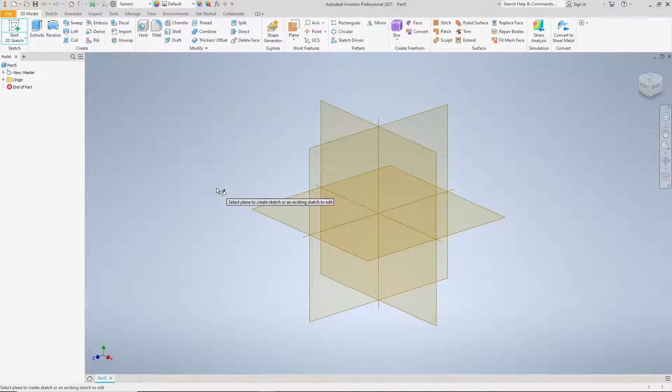I'm going to start a sketch on my XZ plane, and I'm just going to straighten out my view cube in the top right-hand corner. Now we're going to draw our shape, and remember we're just drawing a rough shape for right now.

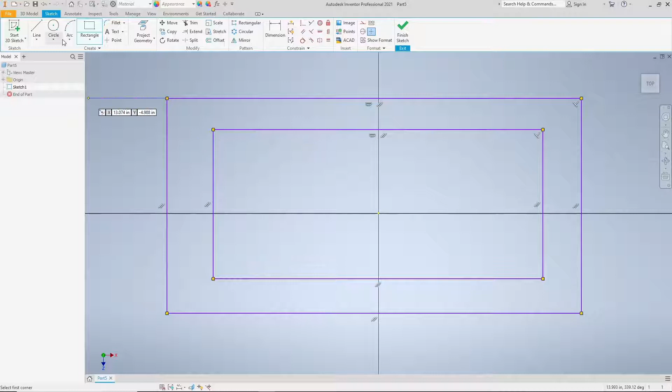So I'm going to place a 2-point rectangle arbitrarily on my screen, and because this command is still active, I'm going to go ahead and place a second rectangle on my screen. I don't have to open that command again, and I could continue placing 2-point rectangles on here if I wanted to. However, I'm going to move on now and place a center point circle. So I'm just going to grab that center point circle command and toss a couple of circles on my screen.

Now it really doesn't matter where you place them, just notice I'm not drawing anything that's locked into my origin point or my center point. So when I talk about the origin point or the center point, that's the little yellow dot between the X and the Z axes on my screen here. So I'm not locking anything into place. Everything's just kind of floating out there.

In Inventor, we use dimensional and geometric constraints in order to fully constrain or to finish our sketches. So in this video, I'm going to go over dimensional constraints. In your Sketch tab, make sure you're on your Sketch tab, follow the ribbon over to the right until you find the Constrain panel. In the Constrain panel, you'll find the dimensional constraints and the geometric constraints that you can use in order to fully constrain your sketch.

This is the General Dimension button. Left-click on the General Dimension button to activate it. You'll notice it goes blue. And we're going to start by dimensioning the top line of our sketch here. There's a few different ways you can dimension a line, and we'll go over those. You're going to start by clicking on the top left corner.

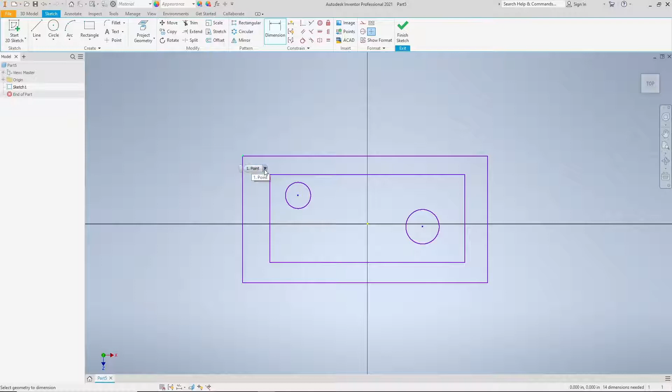You'll notice the little corner point goes green as you hover your mouse over it. And if you let your mouse sit there, Inventor's actually going to give you a drop down here, and it's giving you all the options you can select at that point. So we're just going to click that top corner point. Now, we're saying we want to dimension from this point to another point.

So let's go grab the corner point at the right-hand side of our rectangle. So again, find that little green dot. And you'll notice once you pick both points, Inventor has a distance to measure. It's saying, okay, we'll give you the linear distance from this point to this point. So we're getting our horizontal dimension here. Go ahead and left-click to place that dimension on your screen.

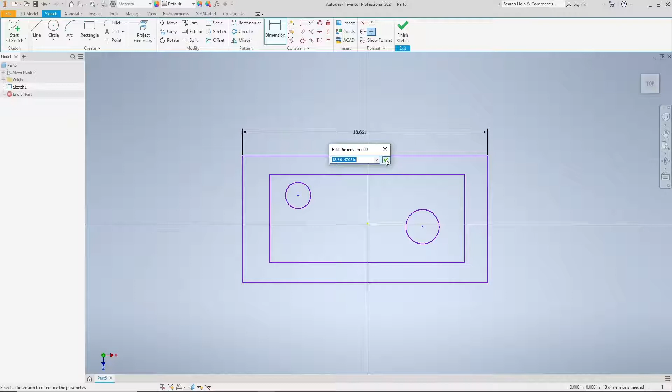Now when you place that, depending on what settings you have set up, you're going to get the Edit Dimension dialog box. For right now, we're just going to accept this at whatever value pops up. It's okay if yours is 2 point something or 40 point something. Don't worry about the value for now. Right now, we're just going to accept whichever value pops up.

Let's go ahead and dimension the left side line now. Now, with the first dimension, we went from corner to corner. Another way you can do linear dimensions in Inventor is to select from line to line. So go ahead and select that top horizontal line on your rectangle. Move your mouse down to the bottom horizontal line and select it. And you'll notice Inventor is going to give us a dimension that goes from this line to this line because those two lines are parallel. Move your mouse out to the left.

Now when I place dimensions on my sketches, there's a couple things I watch out for. I want them to be close enough to the sketch that I can easily find them and read them. What I mean by that is I don't want my dimension way off to the side here, off the side of the screen. But I also don't want my dimension inside of my sketch. It shouldn't be overlapping my sketch, and it definitely shouldn't be overlapping the line here so that you can't read the number. Notice if I place this right here, I actually wouldn't be able to read the 9.331. The one's kind of hiding.

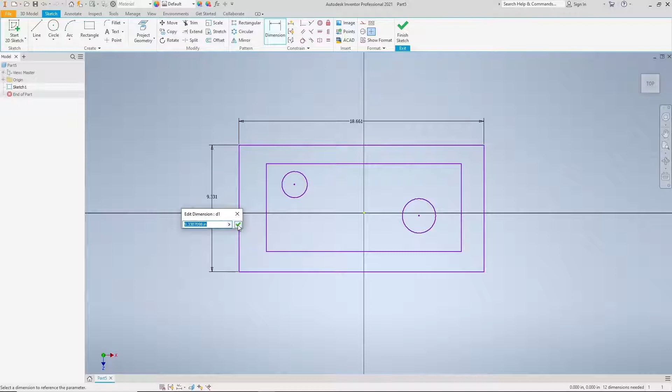So I like to place it just to the outside of my sketch, something like here. And again, for now, we're just going to click that green check mark and accept the value at whatever value it is right now. The third way you can dimension a horizontal or vertical line is just to click on the line itself. So again, my general dimension button is still active, so we're still good to go.

Go ahead and click on that horizontal line on your smaller rectangle. You'll notice just by selecting the line, Inventor is going to give us a dimension of the length of that line. So one click. Again, we're going to drag that to the outside of our shape and just place that and accept the value. Now let's go ahead and do the height of the smaller rectangle. So again, I'm just going to select that line, drag that to the outside of my shape, place it, and accept the value. So you should have 4 dimensions on your screen right now, 2 vertical and 2 horizontal.

To edit the values of your dimensions, if your general dimension button is active, you only need to click on those dimensions once. The Edit Dimension dialog box will pop up, and in here you can edit the value. If your general dimension button is not active, you just need to double click on the values in order to edit them. And then the same Edit Dimension dialog box will pop up. So now let's go ahead all together here. We're going to double click on the largest dimension here, the length of the biggest rectangle.

Here's a quick little tip for you when you're designing your shapes in Inventor. You want to dimension the largest features first and then work inwards to the smallest features. Sometimes when you place dimensions on your sketches, your sketch will do what's called distortion. It will actually cross over itself and kind of lose that general design intent that you put so much work into with your overall rough sketch. So start with the biggest dimensions and work inwards to the smallest dimensions. That should give you the best success when dimensioning your shape.

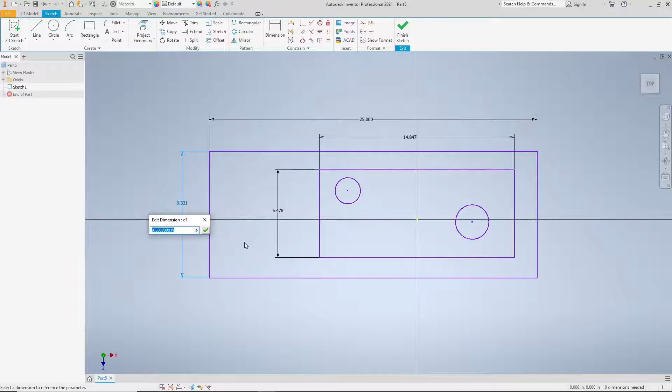So double click on the length of this rectangle, and we're going to change this to a length of 25. So type in 25, and that will be in 25 inches, and you can either hit the green check mark or hit enter on your keyboard. Notice that Inventor automatically updated the top and bottom horizontal lines so that your rectangle kept its 90-degree angles in all 4 corners. Now let's go ahead and edit the height of this rectangle. So double click or just single click depending on if your general dimension button is active, and type in 10.

Let's change the length of the smaller rectangle now. So find the length, the horizontal dimension of the smaller rectangle, and type in 20. Change the height of the smaller rectangle to 8. Now we're going to right click, and if you have your general dimension button open, just choose the OK button to close that.

Now if you want to move your sketch dimensions out of the way, so for example my 8 is kind of overlapping my x-axis here and it's kind of hard to read, plus it's also on the inside of my shape, which I don't like. So just make sure your general dimension button is not active, otherwise this won't work. But you can just left click and hold, and you can actually move these dimensions around.

So that comes in handy sometimes when you're trying to select part of your sketch and the dimensions are in the way. So you can just move them to where you want them to be. So again, if you need to move your top ones, just left click and hold, and you can drag them to wherever you need them on your page.

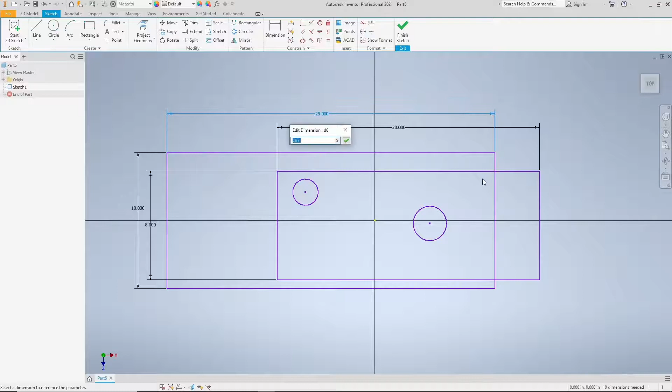Now if I want to change my dimension values again, so I changed my length of my biggest rectangle to 25 inches to start with, but I actually want that to be 22. So you can edit these as many times as you need until they are the values that your design needs. So I'm going to double click on that 25 and change that to 22. And notice that my rectangle updates to match those changes.

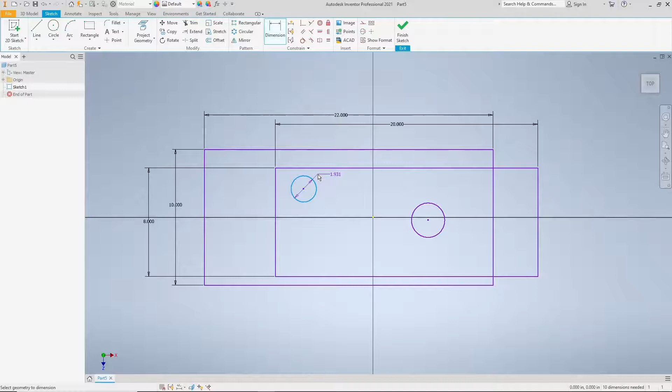Now we're going to dimension the size of our circles, so click on that general dimension button again to activate it, and the general dimension button is actually very handy. You don't need to pick a bunch of different buttons for all the different types of dimensions you're placing on here. So for our circle, we're looking for a diameter. You just left click on the circle and Inventor automatically recognizes that it is a full non-broken circle, so it's going to give us that diameter dimension.

So we're going to drag that outside of our shape so it's out of the way and type in a diameter of 2. Go ahead and dimension your second circle to also have a diameter of 2.

Every dimension we've placed onto our screen up to this point have been what are called size dimensions. There's two different types of dimensional constraints we talk about in Inventor. There are size dimensions, and then there are location dimensions. So size dimensions actually change things like the length of a line, the size of a circle, the size of a slot, the length of an angle. It actually changes the physical size of your sketches.

Location dimensions do not change the size of your shape. Location dimensions actually just place all of your little sketch features where you want them in relation to one another. So what I mean by that is currently my little rectangle here is sort of overlapping my big rectangle. I actually want this little rectangle to be located in the center of my big rectangle. So let's place a location dimension on here.

I'm going to dimension from the left vertical line of my larger rectangle to the left vertical line of my smaller rectangle, and we want this to be centered, so that's going to be a value of 1. So go ahead, edit that dimension to 1 inch. And what we did there is we didn't change the size of anything, we just changed the location of these two rectangles with regards to one another.

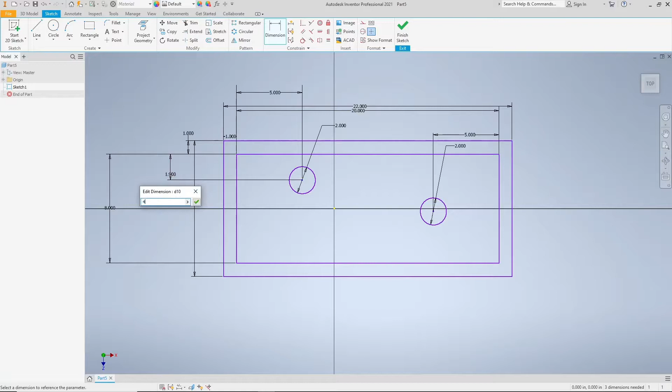And do the same thing for the other circles. So from the top line of my smaller rectangle to the center of my circle, type in a height of 4. So now all of my rectangles and my circles on my screen are all dimensioned in size, and they're also dimensioned in location to one another.

Now there's one last thing we want to do. We actually want to dimension our sketch with regards to the center point of our screen, so the origin point between the X and the Z axes. So we're going to center our entire sketch around that origin point. We're going to create a dimension from the very left-hand vertical line of our big rectangle to the origin point on the screen. It's that little yellow dot where your X and your Z axis meet. Drag that out of the way, and that one's going to be a distance of 11 to center it. Again, we've just done the horizontal constraint. Now we need to do the vertical constraint.

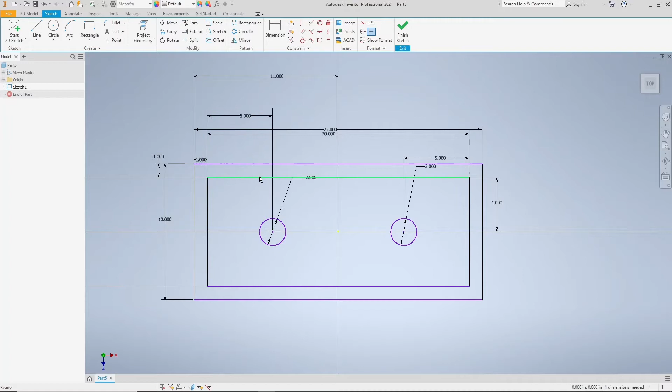You'll also notice something here. When we put our dimension of 11 inches on here, notice that some of these lines turned black. When your sketch lines turn black, that means they are fully constrained, which means I cannot grab these lines and move them. Let me show you. So right now I'm going to grab this purple line on my screen. And if I grab it, I can move it up and down still because the purple lines are not fully constrained. They can still move. They still have some degrees of freedom.

Now if I grab one of these black lines and try to move it, notice that nothing happens. I grab that black line, I'm trying to drag it around, it's not moving because it's fully constrained. And this is a goal for all of your sketches. You should try to fully constrain all of your sketches. So let's finish this one.

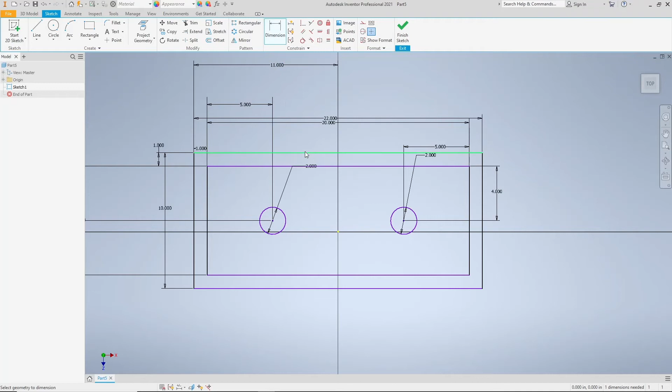We're going to dimension from the top line to the origin point, and we're going to dimension that to be 5. Notice that our entire sketch now has turned black. Nothing is left purple on our screen. This means that our sketch is fully constrained, it is fixed in place. Nothing is going to get modified that you don't intentionally come in here and modify. So this is what we want. We are now done dimensioning our sketch, and you can go ahead and click on Finish Sketch.